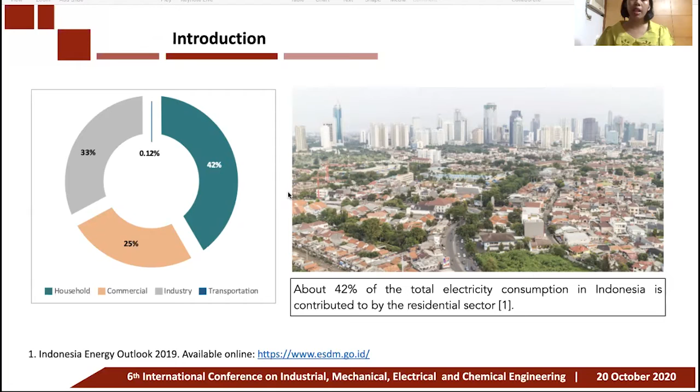As we know from the Indonesia Energy Outlook 2019, data shows that about 42% of the total electricity in Indonesia comes from the residential sector, about 33% from industry, and the last one, commercial, holds about 25%. And we know that modern houses in Indonesia rely mostly on lighting fixtures and air conditioning. It means more energy is used to drive mechanical appliances and increase greenhouse gas emissions.

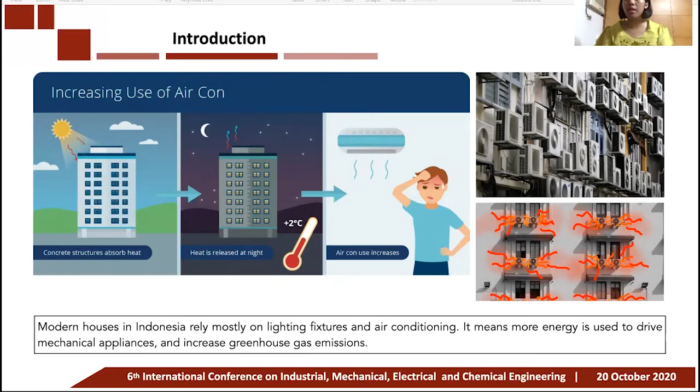As we can see in Indonesia, there are a lot of traditional houses from Sumatra, Java, and Irian Jaya. All regions in Indonesia have traditional houses, and various studies have shown that vernacular houses consume less energy and leave little environmental impact to achieve good indoor thermal comfort. From this figure, we can see a key characteristic of vernacular architecture is its location-specific, climate-responsive design strategies. They always design their houses based on trial and error. So we can see that they adapt very well to the local climate.

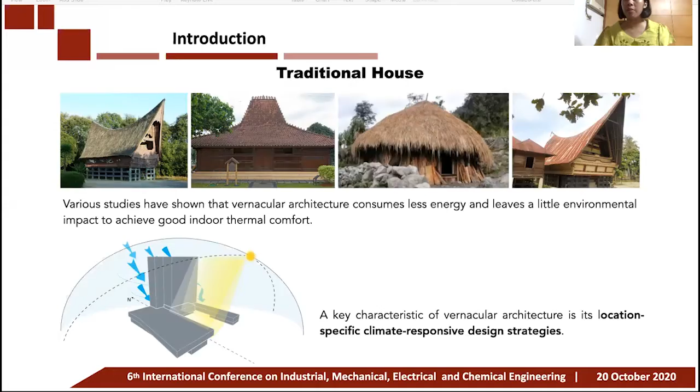And this is one example of traditional houses. Strong characteristics of Indonesian dwellings are natural ventilation and elevated floors, since we live in a tropical climate and most of the season is summer and the other is rainy. So both these strategies are best to get thermal comfort. These two characteristics also appear to have a strong impact on the effectiveness of indoor air movement.

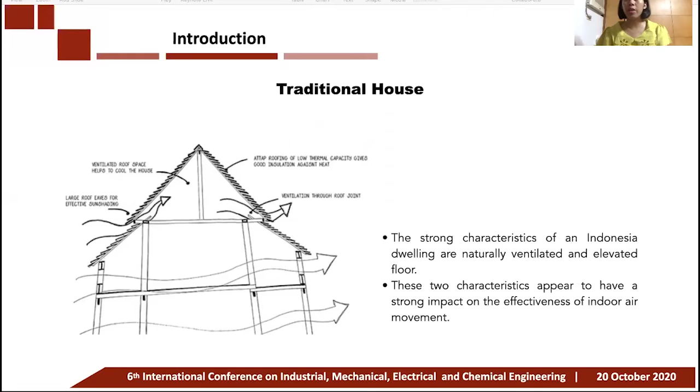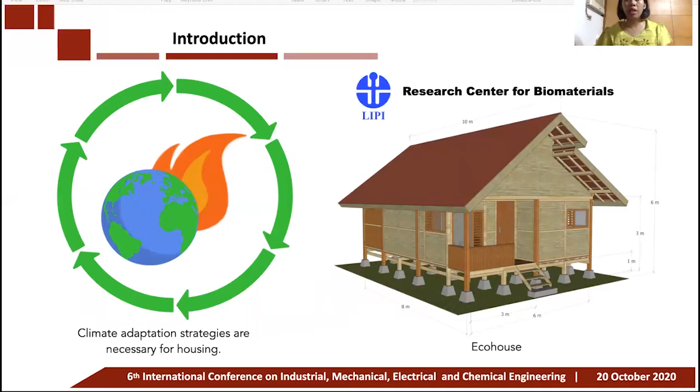So based on that concept, I designed the Ecohouse. It is a prototype house already built in Indonesia, in the Research Center for Biomaterials in LIPI, Cibinong. This design is based on climate adaptation strategies. This is the location of the Ecohouse in Cibinong, and it is designed based on an open plan concept with an open kitchen, adapting the Indonesian vernacular house: raised floor and natural ventilation, and then unique insight into wind behavior in an actual house.

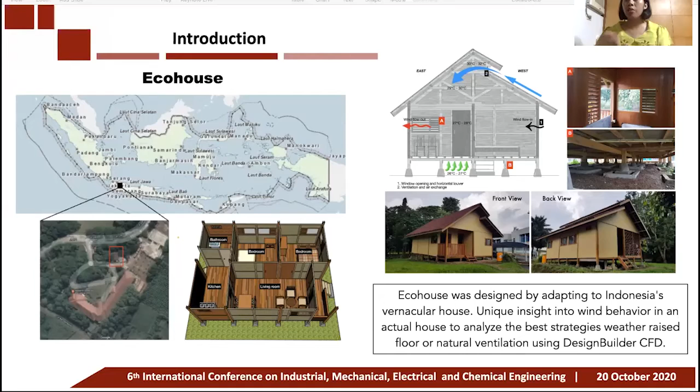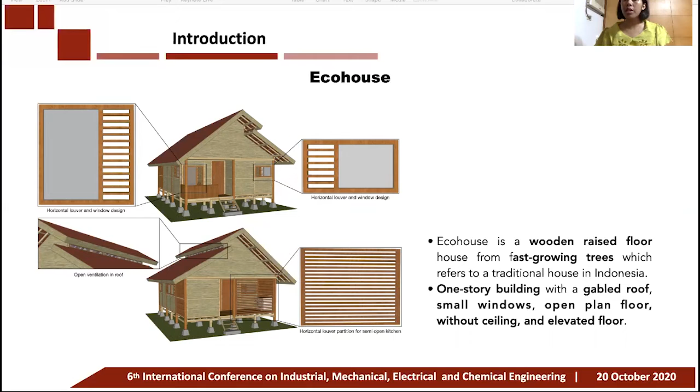So we built this house to analyze not only the concept, but also how it will be built in reality. And we analyzed the wind flow based on DesignBuilder CFD. Some openings I designed in this house are horizontal louvers, an open ventilated roof, and a raised floor. This house is also built from fast-growing trees, which refers to traditional houses in Indonesia: a one-story building with a gable roof, small windows, open plan floor, no ceiling and an elevated floor.

To analyze the wind flow inside the building, we should know the Bogor weather data. Since Cibinong is located near Bogor, this research used Bogor weather data. The wind direction mostly comes from the south. The rectangular plot of the Ecohouse runs south to north, so it's perfect. The average temperature is about 26 Celsius every month, and the daily highest daytime temperature can reach above 34 degrees, while the lowest can drop below 20 degrees.

After I got the basic data, I calculated using the power law, so I can find the wind profile of Bogor. Then I chose one family to represent those living in this house: father, mother, son, and a woman, meaning the son's nanny. I got this data from a family in Jakarta. So I assume this family lives in this Ecohouse, and I simulate using DesignBuilder.

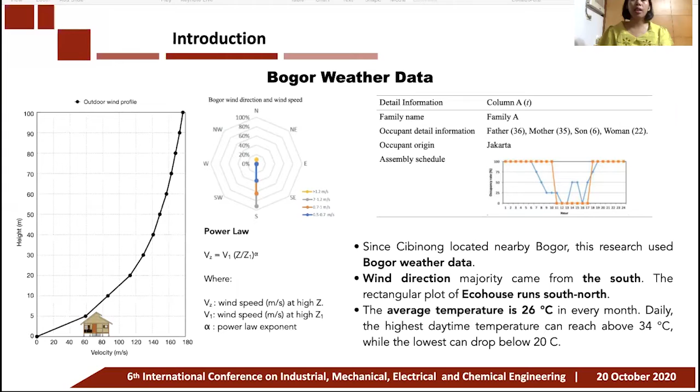First step, investigate the wind behavior. We're using DesignBuilder CFD as a simulation program. The simulation begins with simplifying the building geometry, then calculating the mesh using this program, using external and internal analysis. And we use a non-uniform grid system. The best part of DesignBuilder compared with other simulation tools like Fluent:

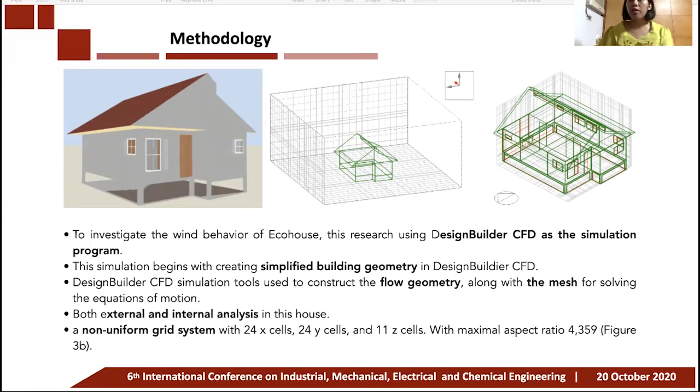DesignBuilder can automatically calculate the grid and the mesh, so we don't have to calculate manually like in Fluent and Gambit. After that, I also did validation. Before doing the simulation, we collect the data and validate the result from the DesignBuilder simulation.

So first, I simulate the energy consumption of this house. During that simulation, I can find the temperature result, and I compare with tools like HOBO temperature loggers, which I put in several places in this house, and we found that the temperature between simulation and actual measurement is close on the selected typical day. So we can see that the simulation works and nothing is wrong, because the result is almost similar, just different around 12 to 2%.

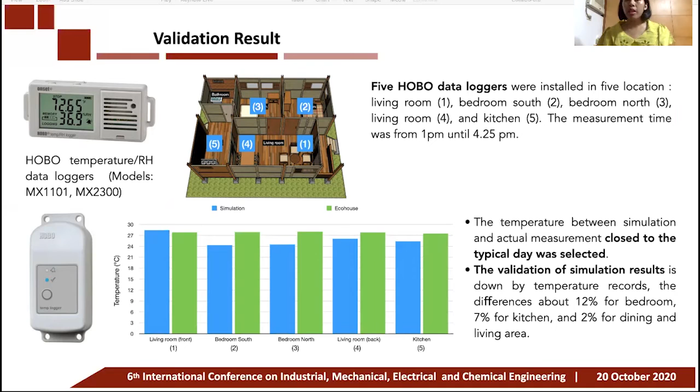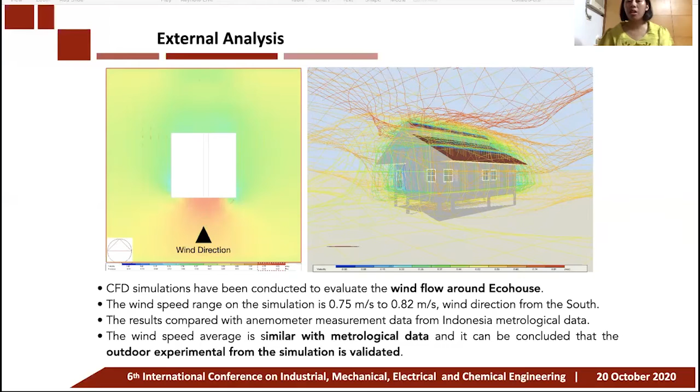And then we continue the simulation using CFD. This is the result of external analysis. CFD simulation has been conducted to evaluate the wind flow around the Ecohouse. The wind direction comes from the south, and the speed range is about 0.75 meter per second to 0.82 meter per second. The result was compared with anemometer measurement data from Indonesian meteorological data, and the result is almost similar. So this external simulation is also validated.

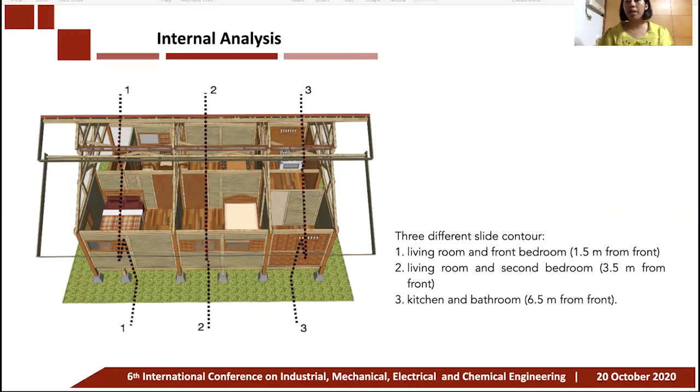Move to internal analysis. I slice this house plan into 3 slices to get a more detailed result. The first slice cuts from living room to bedroom. The second slice from living room and second bedroom. And the last slice is from kitchen and bathroom. And this is the result. We can see the wind flow around the house. The strongest wind velocity occurs in the front area, meaning the living room. And then decreased when wind reaches inside the house. Wind velocity mostly comes from the horizontal fin near the glass window.

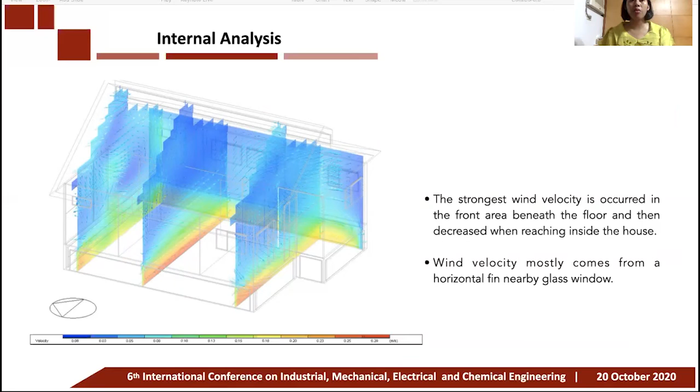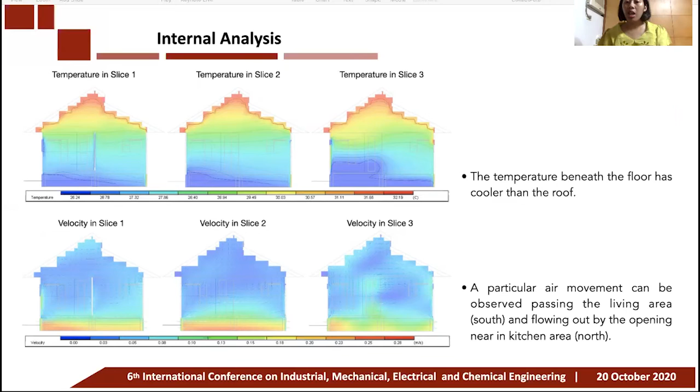And this is the other result analysis. The temperature beneath the floor is cooler than on the roof. And particular air movement can be observed passing the living area south and flowing out by the opening near the kitchen.

So I think the open plan concept that is supposed to reduce the heat from the stove and other appliances is not effective enough. So it's better to make the kitchen more closed, not semi-open.

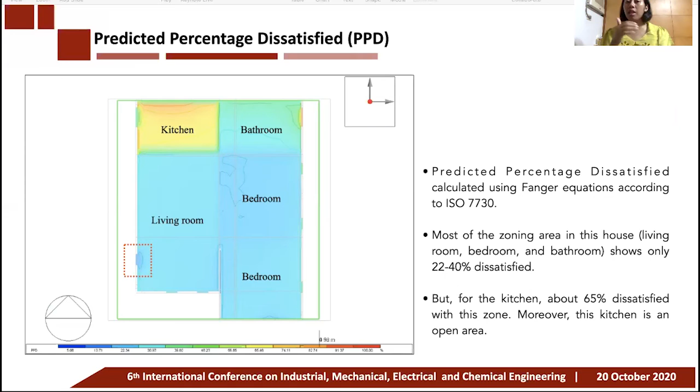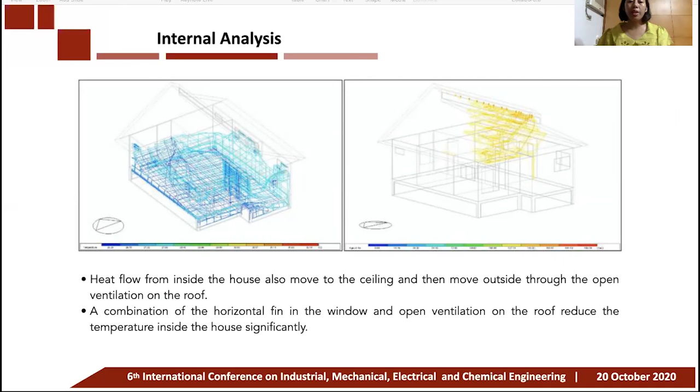And more detailed internal analysis shows that the heat flow from inside the house also moves to the ceiling. So from below the floor, and then through the opening to the roof. So a combination of the horizontal fin in the window and open ventilation on the roof reduces the temperature inside the house significantly. So the conclusion from the research is the raised floor contributes to creating better thermal comfort through heat transfer from ground to the roof.

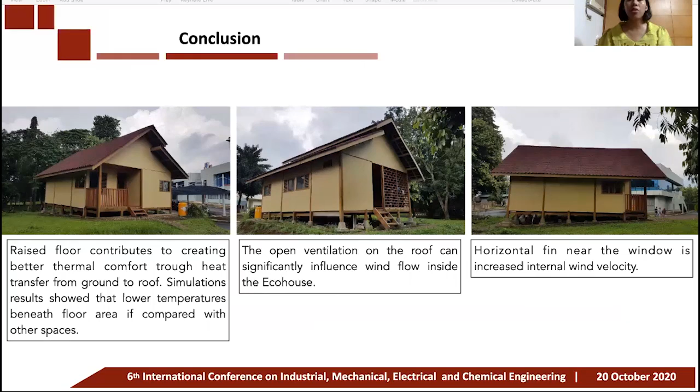Simulation results show lower temperature beneath the floor compared with other spaces. Open ventilation on the roof can significantly influence wind flow inside the Ecohouse, and the horizontal fin near the window increases internal wind velocity. Both the raised floor and roof ventilation play a crucial role for wind movement, and they should receive more attention from building designers and the research community. Further investigation needs to be performed for other kinds of ventilation design and different heights, since it contributes to reducing the temperature.